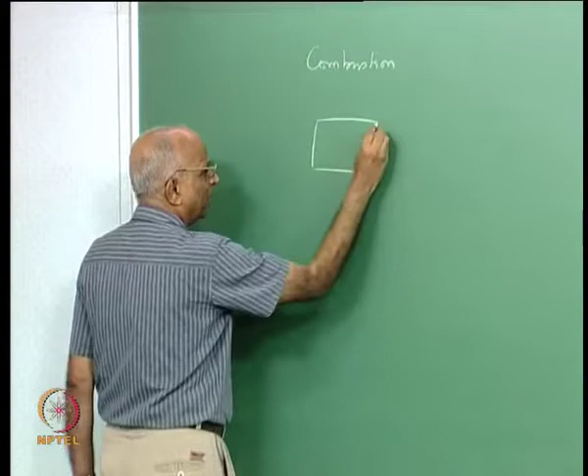We talked in terms of a liquid propellant rocket. We told ourselves if the steady pressure in the rocket, pressure versus time, falls in some way, and if the pressure drop across the injector is less than some value relating to the chamber pressure, it is always possible for the oscillations to grow with respect to time. This is like a diverging situation, and the pressure could reach a level wherein the case may not withstand it, and it becomes a problem.

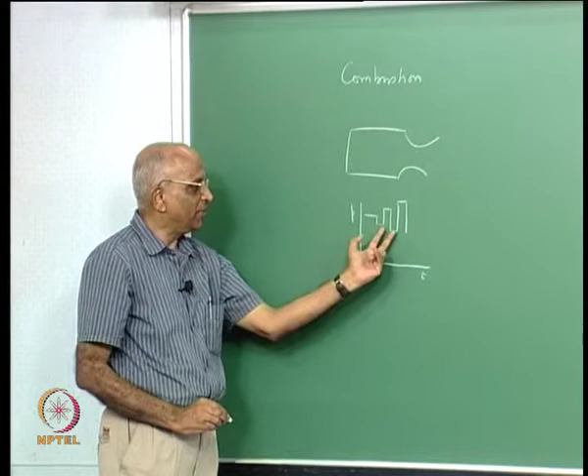Whenever we talk of instability, we mean there is a particular frequency at which the events happen, and also the pressure amplitude keeps growing.

How do we represent it? We said to show something square like this is difficult. Maybe we take a sinusoidal oscillation, and if we have a sinusoidal oscillation, the cycle starts here, goes to a maximum, comes back, and starts again. This is the wavelength of the oscillation, and whenever we talk of a wavelength, that means one cycle of oscillation corresponds to the wavelength, and this is lambda.

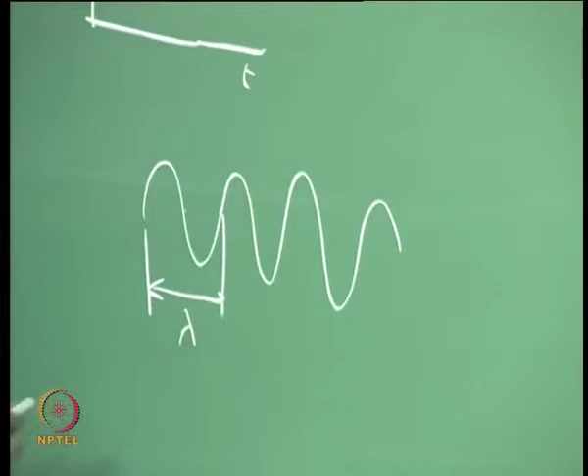Lambda centimeters or lambda meters equals the wavelength of your oscillation, and the amplitude of oscillation, the maximum value above the mean value, is what we call the maximum amplitude p hat. If I have to show this cycle of oscillations, I could say it is like a sin theta or a cos theta, and therefore I can write the oscillation at any particular point.

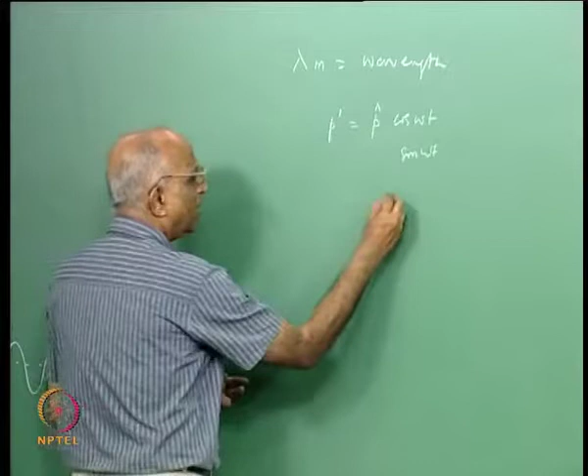How do I define frequency? I have a wavelength lambda, and if my wave is travelling at speed a, then the time of one oscillation equals the wavelength divided by the speed of sound, meaning meters divided by meters per second. So this lambda corresponds to a time t.

What is the frequency of oscillation? Frequency equals 1 over time, so many cycles per second, or this equals a by lambda. Or if I put the frequency in terms of radians per second, omega equals 2 pi into f, so much radians per second.

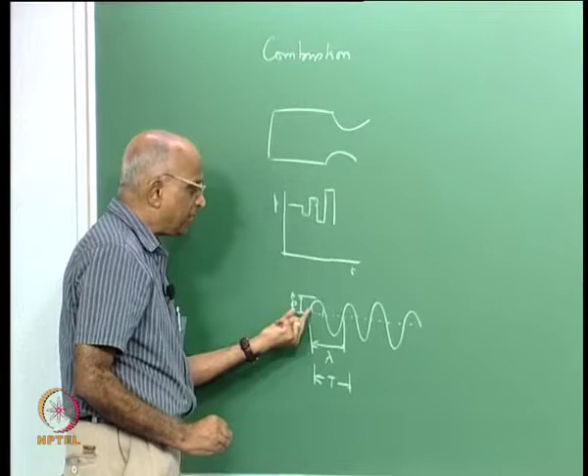How do I now show the pressure amplitude, in terms of both frequency and this value? When omega refers to so much radians per second, the value p prime equals p hat, the maximum amplitude, into e to the power i omega t.

I also wanted to tell whether the oscillations are going to grow with respect to time. If it is growing, the value of p hat will keep growing — it grows with respect to time. So I add one more term and say p hat or p prime can be written as some nominal value into e to the power alpha plus i omega into t, where alpha shows the rate at which the oscillations keep growing.

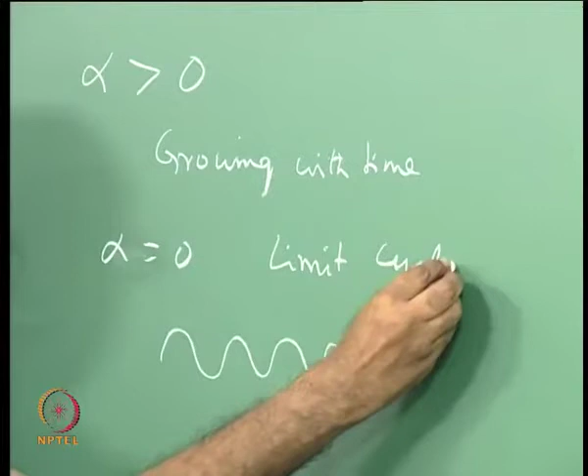If alpha is greater than 0, it means the oscillations keep growing with time, and the system is unstable. If alpha is equal to 0, the oscillations are steady — whatever the peak, it keeps going the same, something like neutral, or a limit cycle oscillation, meaning it keeps oscillating at the same amplitude. If alpha is less than 0, the amplitude keeps decreasing, meaning it is a stable system.

We had defined alpha as the growth rate of the oscillation. What is the unit of growth rate? If I take the logarithm of both sides, I have ln p prime equals ln p hat plus alpha t, therefore 1 over second must be the unit of growth rate. Let us put it together.

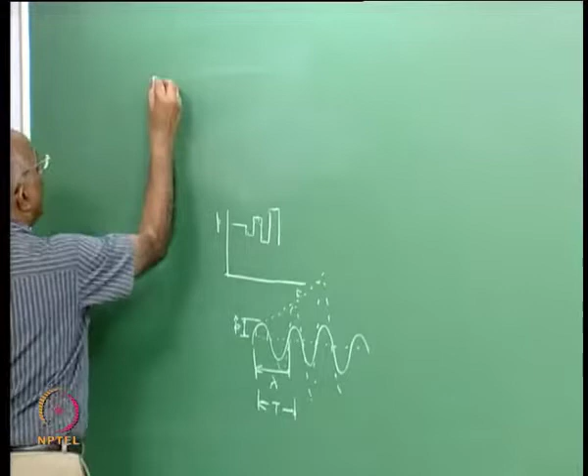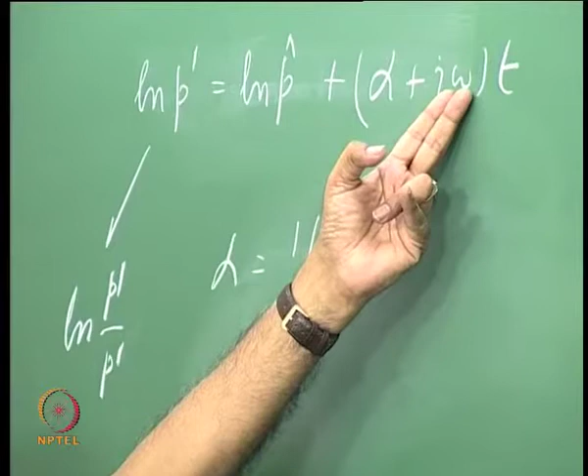I want the unit at which the waves grow. I have ln of p prime equal to ln of p hat, plus alpha plus i omega into t, because ln of e is 1. Therefore the unit of growth rate should be 1 over second, because this is ln p minus ln p hat, so I can write ln p prime minus ln p as ln of p prime by p hat. Therefore alpha should have units of 1 over second, and frequency also has units of radians per second. This is the way we normally show the oscillations.

We also talked of one more important thing. We said that in some cases, when we considered this particular rocket chamber, we never really differentiated the pressure at this point from the pressure at this point. We told ourselves a liquid fuel is injected, it gasifies and produces hot gases, mixes, burns, and the pressure in the entire chamber is the same throughout.

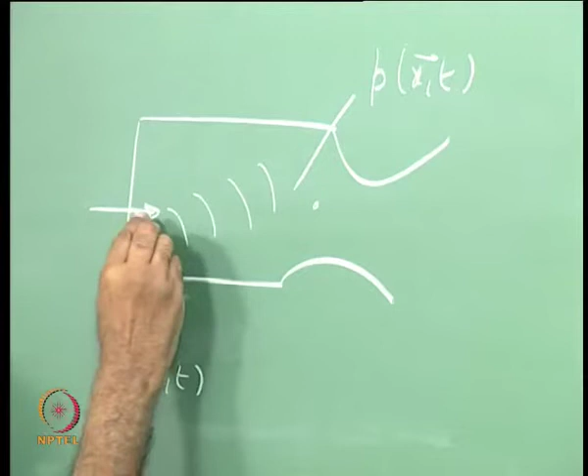But we also know that if I were to create a disturbance at this particular point, the disturbance should travel with respect to time. Therefore the pressure here, if I were to write as P(x,t), should be different from the pressure at this particular point, maybe P prime is the disturbance we are getting. It will be different at different locations x, where x could be a vector, maybe along the axis, it could be anything. As the position changes, maybe the pressure should change, provided the waves are traveling.

When we considered the question of the injector and something being built up, we assumed that the entire bulk of the oscillations, or bulk of the chamber, oscillates in unison. That means whatever the pressure is here is the pressure here is the pressure here, and this is valid only under certain conditions which we have to see.

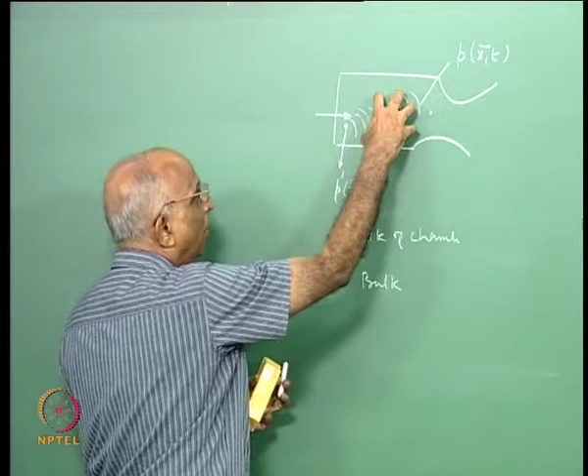Why did we make these assumptions? Therefore we talked of bulk oscillations. What did we mean by bulk? The entire mass of gas in the chamber is as if it were at a point, that means a lump mass assumption, and we lump all the things together and call it a bulk oscillation.

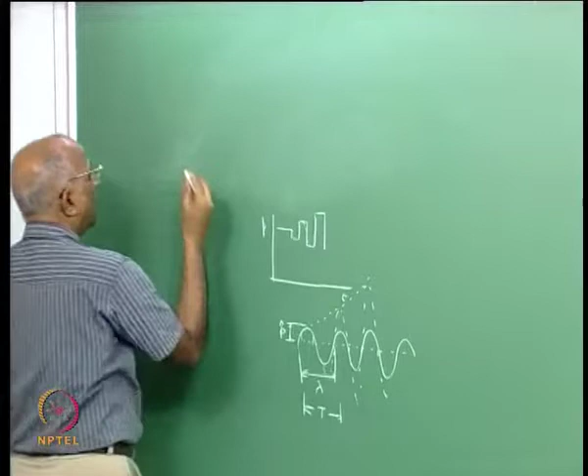Having said that, we also came to the question of: supposing I have a wave, how do I describe a wave, and what did we get at? We said, well, I could have a wave, and let us consider an acoustic wave. What are the different types of waves? We can talk in terms of an electromagnetic wave, an acoustic wave, a shock wave, maybe a blast wave - we will have to look at some of these waves.

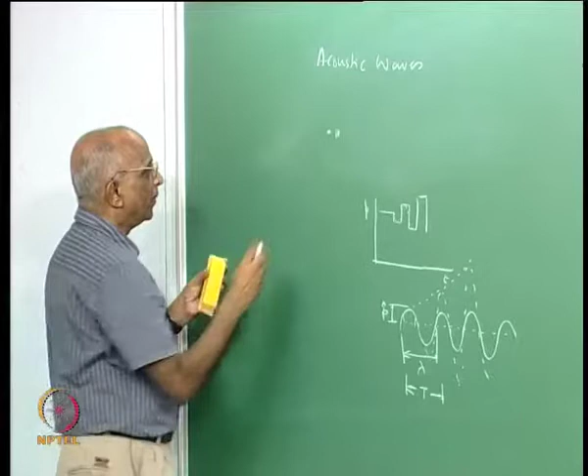When I say an acoustic wave, we mean something like a sound wave, and that is how a disturbance propagates. I make some noise and it comes to you - so what am I talking of? Maybe I make some disturbance, and how does the disturbance come to you? Maybe it compresses the medium - my vocal cord compresses, then it releases, then again it compresses, again it releases the medium.

That means we can represent it as a series of compressions followed by rarefaction, followed by compression. That is how a wave travels, and a sound wave travels at a speed of a meters per second. Under room temperature and room pressure conditions, we know that the sound speed is around 330 meters per second, but it need not be the same speed in a chamber - we will have to see that.

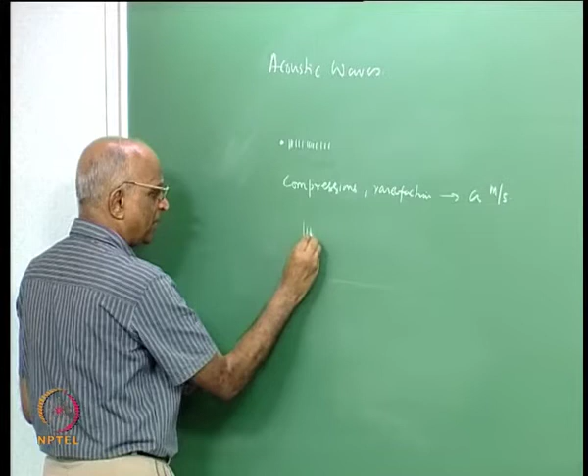Therefore, all what we said is, if it is going to travel as compression and rarefaction, that means I have a compression followed by expansion followed by compression followed by expansion. I can as well show a compression like this, a rarefaction like this, and a wave can be schematically shown as a compression followed by expansion. This is the way a wave travels, and this is x and this is your value of p prime.

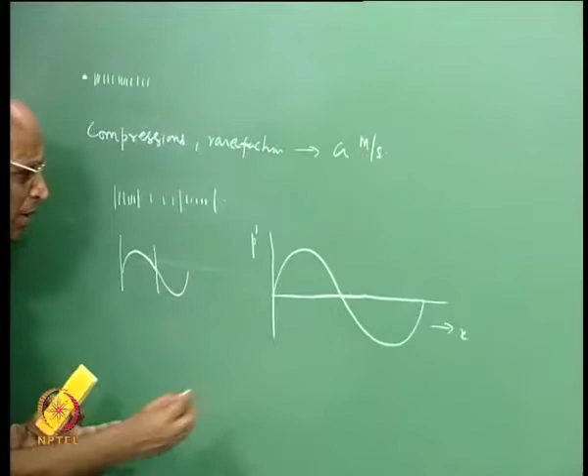Now we wanted an equation for this, and we said yes, this point and this point are in the same phase.

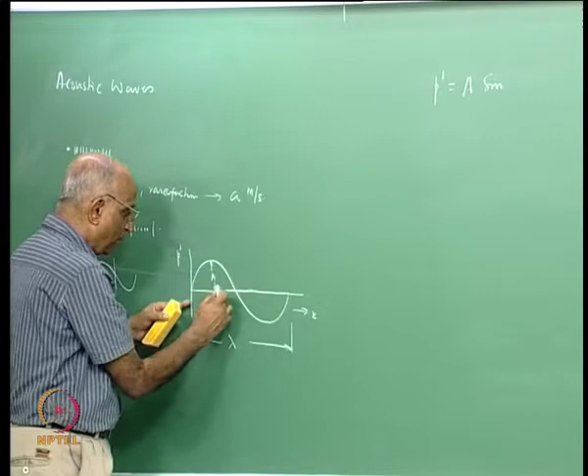I can show this by wavelength lambda, and a wave which consists of compression and rarefaction can be described by an equation. Let us write an equation for this. We say x is the distance along the direction of propagation, and p prime is equal to the amplitude. This amplitude I call a, and it is a single wavelet I am taking, a into sine of 2 pi corresponding to lambda, and I want to find out the amplitude at x. Therefore, x by lambda gives me a particular position, so 2 pi by lambda into x is the equation to this.

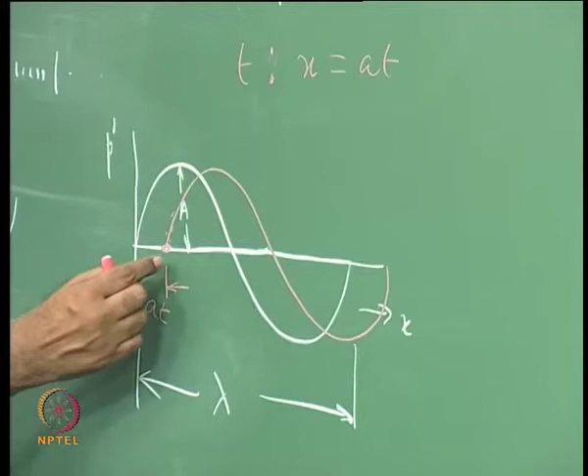But we also said that this wave is apparently travelling, and if it were to travel at a speed a, at a time t, the wave should have travelled a distance x is equal to at. At time t it would have come over here to this position, and this distance travelled is equal to at. Therefore, the equation to this travelling wave, since I want at any x, I have to subtract the value of at, becomes a sine of 2 pi by lambda into x minus at.

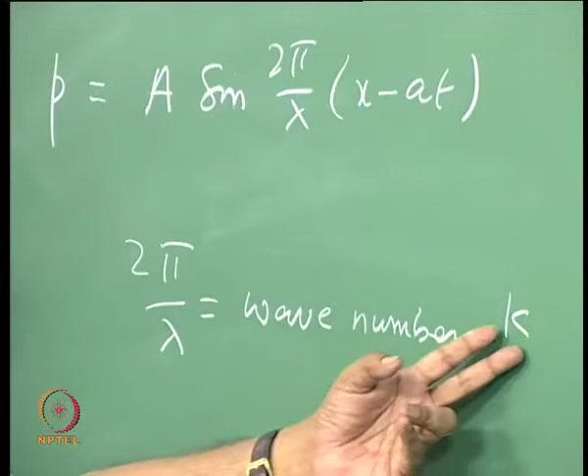Now we want to simplify the whole thing again and put this equation in a slightly simpler form, more amenable to analysis. So I can always say 2 pi by lambda is what we call a wave number, and this I call k, capital K. Capital K tells the wave number, defined as 2 pi by lambda.

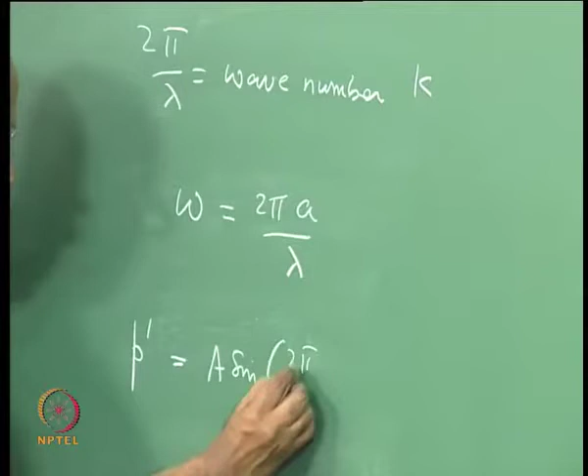Now I substitute these two into this equation, and I get the oscillation p prime is equal to a sine of 2 pi by lambda into x minus 2 pi by lambda into at. Since I know the wave number is 2 pi by lambda, I can write it as a sin(kx), and 2 pi a by lambda is equal to omega. Therefore the equation to the wave which is travelling is p prime equals a sine of kx minus omega t.

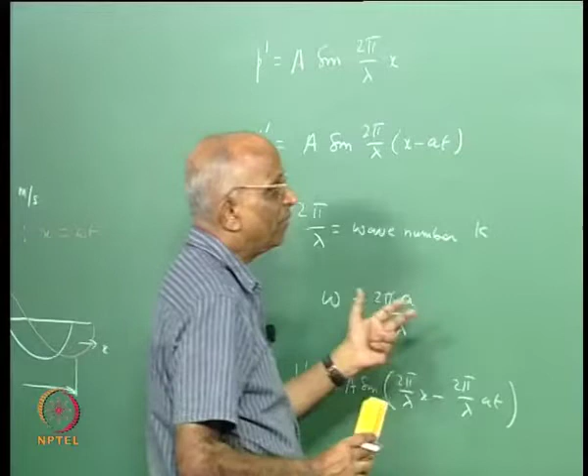Let us remember this form, because k, the wave number, goes inversely as lambda - 2 pi by lambda is known as the wave number - and omega is the frequency. We are interested in the frequency of oscillations and the wave number, so we can write it in this particular form.

Now I consider the wave travelling in a tube, closed at both ends. The wave is travelling forward, comes and hits a solid surface here, and assuming no attenuation - the wave does not lose any energy - it is reflected back. When it is reflected back, travelling in the opposite direction, the equation to the reflected wave should be equal to a sine of minus kx minus omega t, which becomes minus a sine of kx plus omega t.

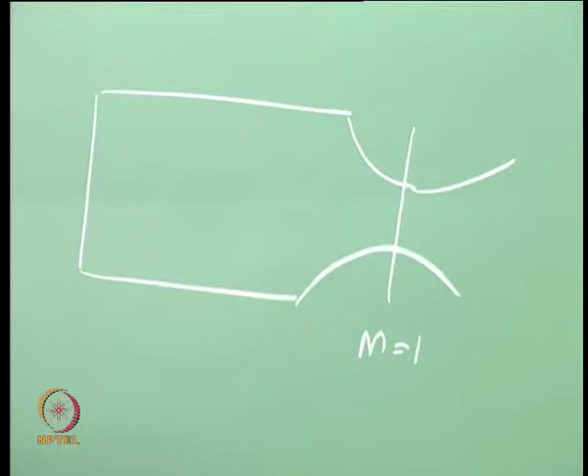Now we want to find out - after all, a rocket chamber consists of something like a hollow, a cavity. What does the cavity consist of? Here it is blocked, here you have the injector, nothing can go in this direction, and you have the nozzle in which high velocity gases are flowing - the throat is sonic, Mach equal to 1. Whenever we plotted the density and pressure variations in the nozzle, we found density keeps decreasing, becoming very rapid at the throat. There is such rapid change in density at the throat that it behaves something like a solid surface itself.

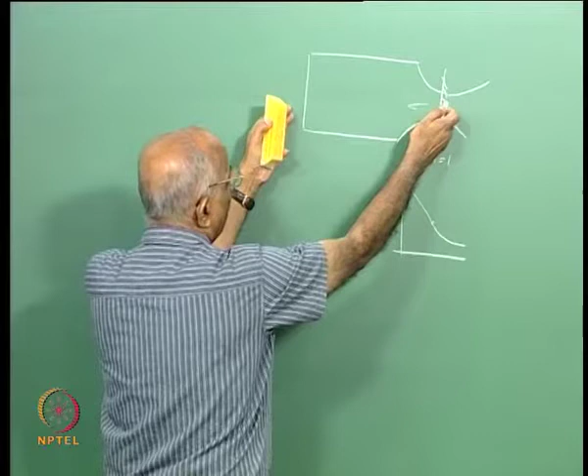There are so many changes in density that the wave, when it sees this, behaves like it's hitting a solid surface, and therefore it reflects back. Therefore, the chamber of any rocket is like a cavity closed at both ends.

Now, you have a wave travelling forward, given by A sin(kx minus omega t), and the reflected one is given by minus A sin(kx plus omega t). Therefore, you have periodic disturbances created as the forward travelling waves interact with the reflecting waves, and the net wave is a combination of the incident and the reflected waves.

Therefore, I can write P, the resultant wave, equal to the incident wave plus the reflected wave. Incident wave P prime, the resultant fluctuation, is A sin(kx minus omega t). Plus the reflected one, which we just saw is minus A sin(kx plus omega t). This is the resultant.

If this is the resultant, let us solve this. Sin(kx minus omega t) equals sin(kx)cos(omega t) minus cos(kx)sin(omega t). Since I have A for the first term, the second term becomes minus A sin(kx)cos(omega t), and now with the plus, it is minus A cos(kx)sin(omega t). Adding these two together, this term drops off, and the resultant wave equals minus 2A cos(kx) sin(omega t).

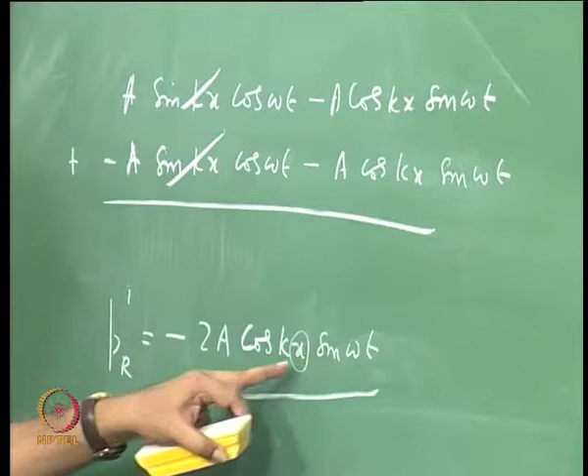Let us ponder on this resultant wave for a couple of minutes and see what is happening. What does this represent? Maybe at some location x, where cos(kx) gives the magnitude of 2A cos(kx), I have P prime. My chamber, which I now say is as good as a closed cavity, and this closed cavity is of length L.

All I am trying to say is maybe at this point x equals 0, cos(kx) is 1, so I have minus 2A sin(omega t), but that means the amplitude of oscillations here is quite large. Maybe it oscillates like this, with my time axis, and the frequency of oscillation is given by omega.

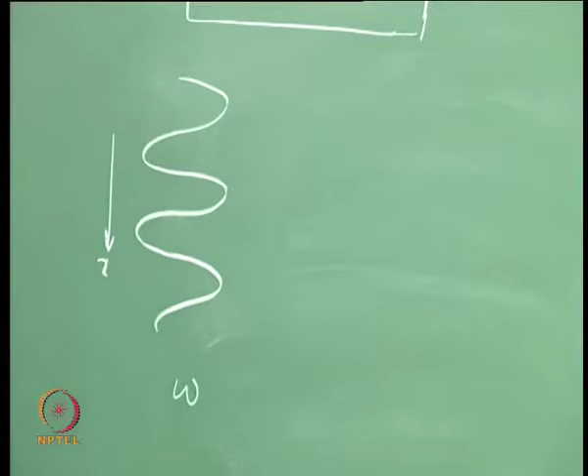Maybe at some other location where x is not equal to 0, cos(kx) is less than 1, so the magnitude at that location is lower, smaller. My amplitude comes down, and I have oscillations at the same frequency omega, but my magnitude gets changed.

At another location, the magnitude may be still smaller, I have to find out, but the frequency will be the same. So what do I get? I get, at fixed points, oscillations of a certain amplitude, and these are not travelling anymore. That means the combination of the incident wave and the reflected wave leads to something like a standing or stationary wave, which no longer travels.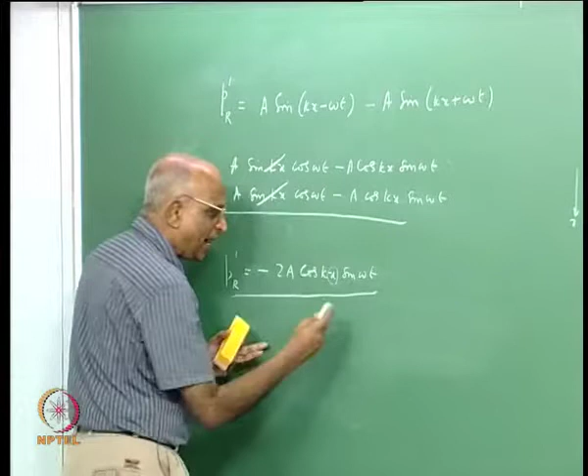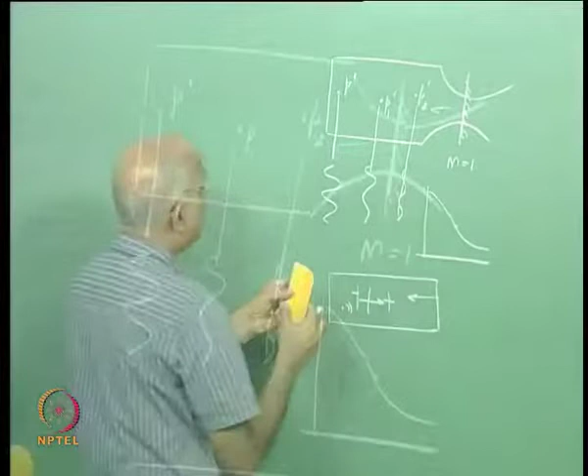So what is going to happen to my combustion chamber? If the waves are travelling forward and backward, at some point I will have a certain value of P prime, at another point a smaller value, and at a third point maybe still a different value of P prime. This P prime oscillates at some frequency, the same frequency everywhere, only the amplitude is different. Here the amplitude may be so small it's like this. Therefore different points have different pressures, but each point oscillates in place, things are not travelling.

That means it becomes a standing wave, and therefore the combination of the incident wave and reflected wave leads to a standing wave. The characteristics of the standing wave are such: at a given location the amplitude remains the same throughout the period, at different locations the amplitude changes, but at a given point the amplitude is the same.

Whereas if I talk in terms of a travelling wave, what is the equation to an incident wave? P incident, p prime, we said is equal to a sin(2 pi by lambda into x minus at). What is going to happen to a travelling wave? The point sees the maximum amplitude a, then it sees a slightly smaller amplitude, then it sees a negative amplitude, then a positive amplitude. Whereas with the combination, at a particular point I get the same value, the amplitude does not change at all, and this is important.

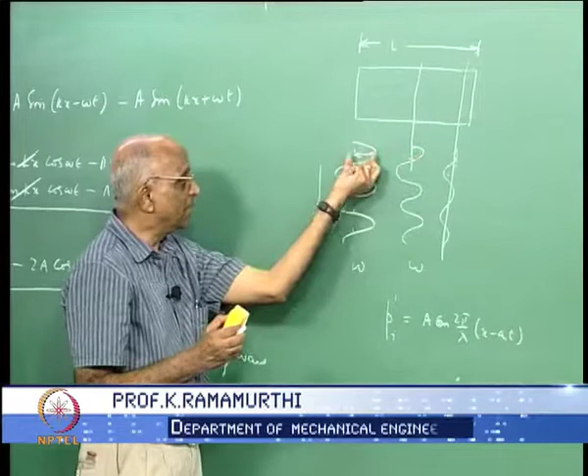In a wave in a cavity, because you have forward and backward waves which are interacting, you are led to a standing wave or a stationary wave, and the frequency at the different points remains the same, but the amplitude at the different points is different.

Is this clear? If this is clear, I can now calculate the frequency. How do I calculate the frequency of the wave? Well, I have the equation to the net wave, let us write it again: P is equal to minus 2a cos(kx) into sin(omega t).

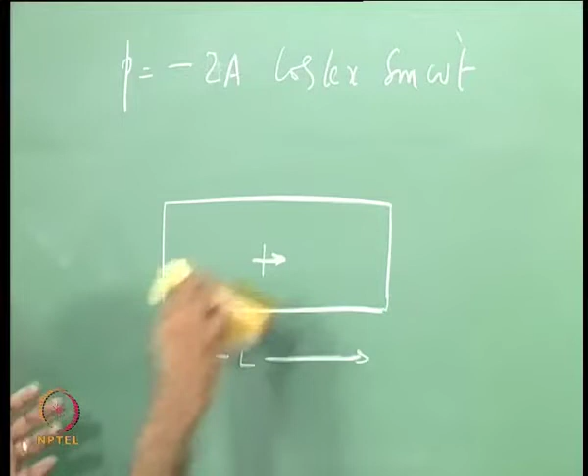Omega is the frequency. I want to calculate the frequency, therefore I again make the same plot. This is my cavity, I have simplified my cavity as a cylinder of length L, and my wave is travelling in this particular direction, it interacts, and therefore I now form a standing wave.

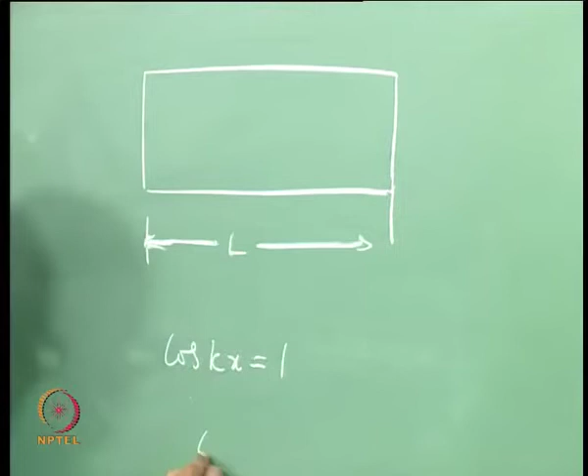Now what is going to happen? I take this particular term and tell myself this is a closed end. At a closed end the velocity perturbation should be 0 because it is a solid surface. If velocity is 0, the pressure should be a maximum, and therefore the value of cos(kx) should be equal to 1 at this end and at this end. At this end, the moment I put x equal to 0, indeed it is satisfied. At this end also it is a closed end, therefore I say cos(kL) is equal to 1.

If cos(kL) is equal to 1, then kL is equal to n pi, where n could be 1, 2, 3, 4 and so on, because we have no control, it could be 180, it could be 360, it could be any number. And therefore, if kL is n pi, and k, the wave number, was equal to 2 pi by lambda, then 2 pi by lambda into L is equal to n pi.

We can now simplify this equation to read lambda is equal to, let us put it together, lambda comes on top, and therefore you have 2 pi L divided by n pi is the value of lambda.

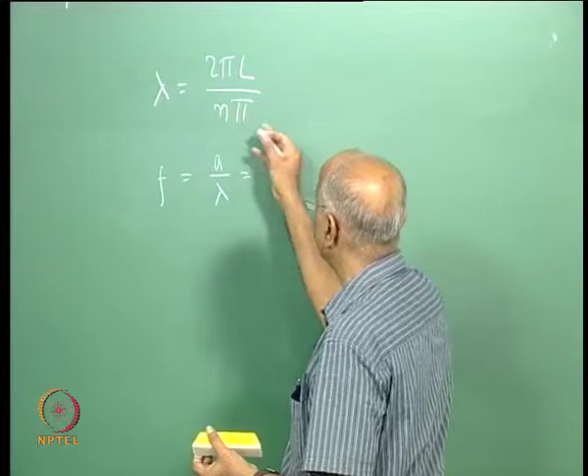And what is the frequency? Omega is equal to, let us put it together, what was A by lambda, or frequency, let us put it as frequency itself, why carry f over here. Frequency is equal to A by lambda, sound speed by the wavelength, that is distance travelled in one wavelength. This becomes equal to, if we were to substitute the value, A into n pi divided by 2 pi L, and pi gets cancelled, so I have nA by 2L is the frequency.

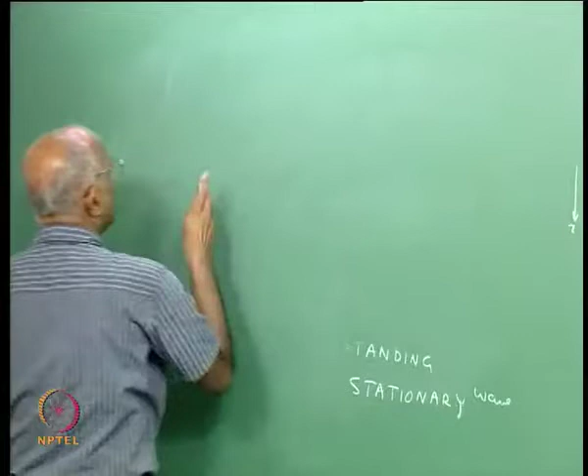Let's internalize this a little bit by working an example. Supposing I have a chamber of length, let us say half a meter, 0.5 meters, which looks reasonable, and the velocity of sound in the chamber is, let us say, 1000 meters per second.

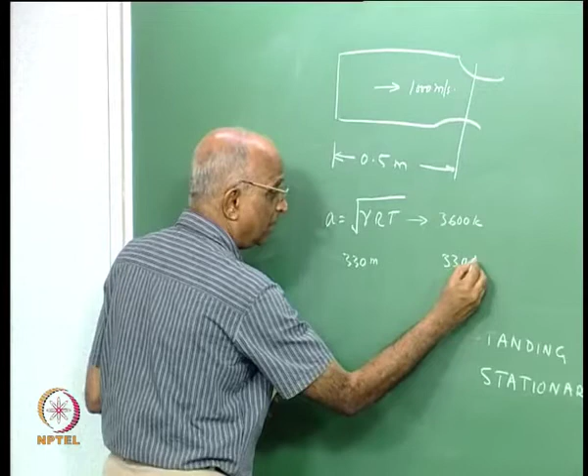Why did I write 1000 meters per second? The velocity of sound A goes as gamma RT under root, which all of you would have derived, A square equal to under root dP by d rho, and therefore this becomes gamma RT, and the temperature in the chamber is quite high, of the order of 3600 Kelvin. The ambient temperature at which sound speed is 330 meters per second is around 30 degrees centigrade.

And therefore, if I take the mean temperature in the chamber to be something like 3000 or 3600, and if I take the ambient temperature as 300 Kelvin, I get the speed of sound to be much higher, maybe under root 10 of 330, and this gives me around 1000 meters per second.

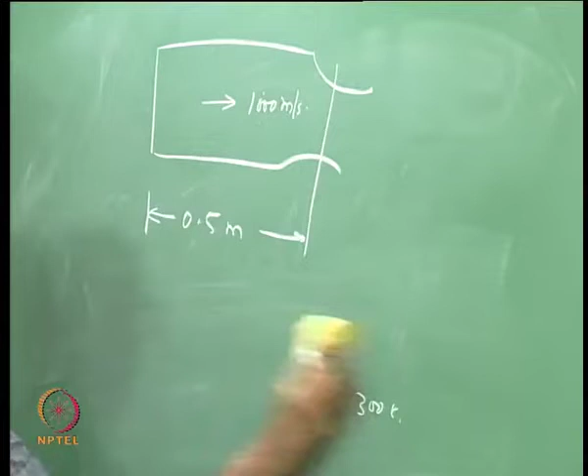I just take a number, it could be between 900 to 1200, and therefore what is the typical value of frequency? For n equal to 1, we have frequency equal to Na by 2L, and in this case n is equal to 1, that means fundamental, A is 1000, divided by 1, which is equal to 1000 hertz or 1000 cycles per second.

This is the frequency at the fundamental, and now if you look at the wave structure, the way the waves are formed, at the point on the left hand side, it is a pressure antinode. At the nozzle portion where you have steep gradients, it is again a pressure antinode. Therefore I have large oscillations over here, similarly large magnitude oscillations over here, and in between at the center I have a node.

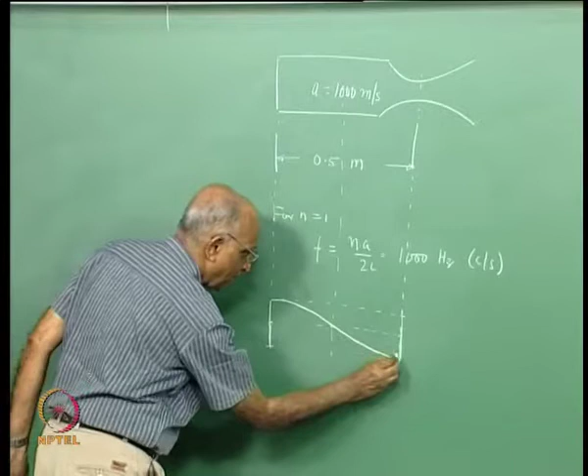In other words, the oscillations are maximum on the left hand side and over here, meaning I have oscillations of this magnitude over here, and similarly on the right hand side oscillations of this magnitude, and now the oscillations keep decreasing until at the pressure node the oscillation is 0. I have therefore the waveform like this.

All what I am trying to say is, on the left hand side where you have a pressure antinode, the oscillations are like this, of large magnitude. The oscillations here in pressure are 0, being a node, and over here the oscillations will be of exactly the same amplitude but of a different phase. Now I will get the value coming out positive here, and negative here, and therefore the oscillations are like this.

Therefore, at the fundamental, you have large oscillations in the amplitude of pressure at the antinode regions. When the oscillation in amplitude p bar is maximum and positive in this case, the amplitude of oscillations leaving the nozzle is negative, and therefore the thrust of a rocket motor, which depends on the pressure at the nozzle, could be out of phase with the pressure oscillations as measured at the head end of a rocket motor.

Our aim was to find out the frequencies for the different cases, and therefore now if I consider n equal to 2, the frequency is now 2 into 1000, that is 2000 cycles per second or 2000 hertz.

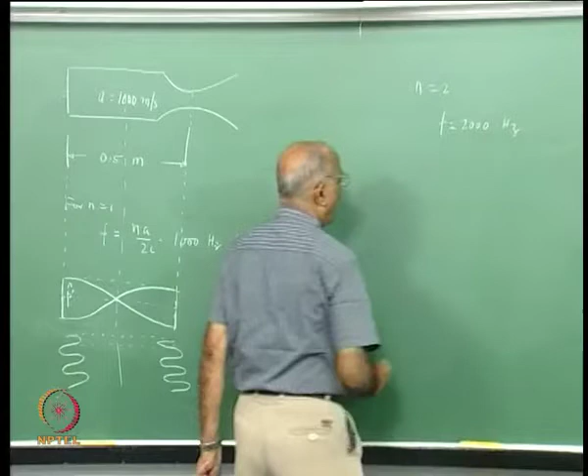What will be the type of wave structure I get? I have something like an antinode here, and at the nozzle an antinode over here. In the first case I just had these points, that was my waveform at n equal to 1. Now I start getting a node here, an antinode over here, a node here, and therefore my magnitude of oscillations will go like this, come back over here, go over here, come over here, go over here, again come back. In other words, n equal to 2 gives me 2000.

In this case, my pressure node corresponding to n equal to 1 now becomes my pressure antinode, and this is my magnitude of oscillations, the frequency is 2000.

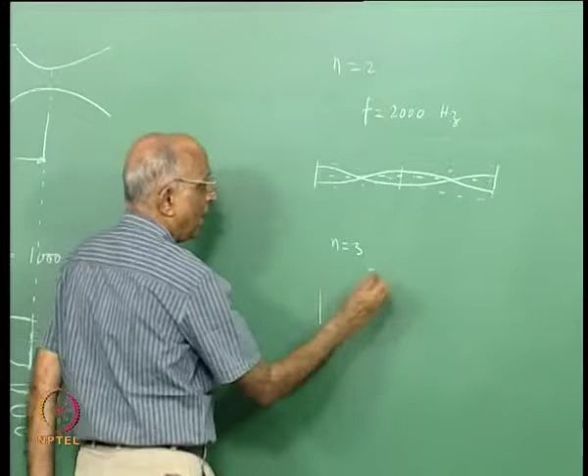When I have n equal to 3, I again need maximum pressure over here, meaning I need one more waveform. I come over here, this again becomes my node, and I start getting more waveforms. I get something like this, coming back over here, coming over here, coming over here, coming over here, and similarly the waveform goes like this, and so on for different values.

Now n equal to 3 gives me a frequency of 3000, and what I observe in all these cases is that I get discrete frequencies corresponding to the case of pressure amplitudes.

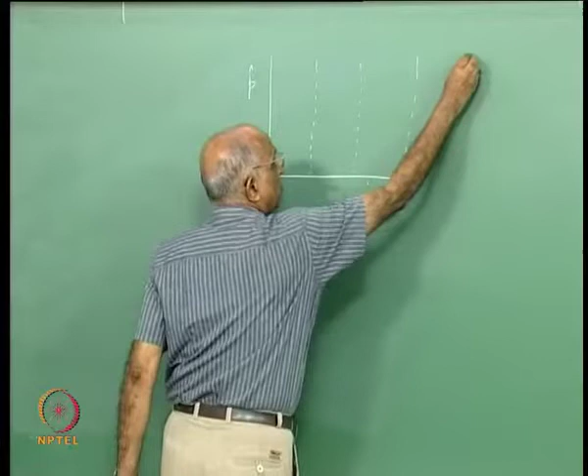Let me plot the maximum pressure amplitude at the antinode portion. I get it at 1000 hertz, then again at 2000, at 3000, at 4000, and so on. These are the discrete frequencies at which I get pressure oscillations. Maybe this is my magnitude here, maybe this might be my magnitude here, this might be my magnitude here, therefore I get oscillations like this.

What is important to note is that only at these discrete frequencies of 1000, 2000, 3000 and 4000 hertz do I get amplitudes. In between these frequencies, say between 0 and 1000 or 1000 and 2000, there are no oscillations at all. It is all discrete at these particular values of frequencies.

We call n equal to 1 the fundamental, and n greater than 1, that is 2, 3, 4, as harmonics. N equal to 2 is the first harmonic, n equal to 3 is the second harmonic, and n equal to 4 is the third harmonic.

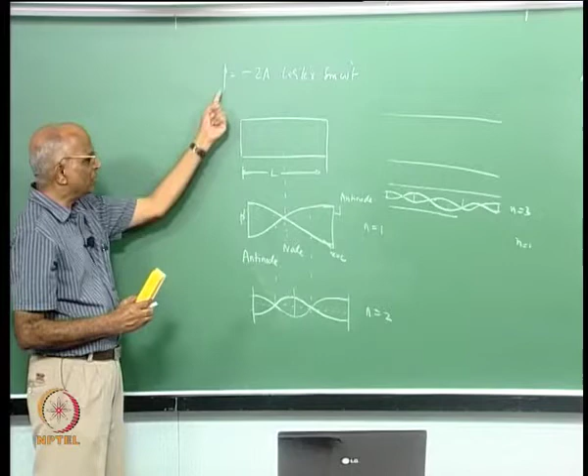Now the question comes, why should there be only pressure oscillations? It is also possible to get velocity oscillations, since in a chamber I am getting flow. I also told you this is a closed end, therefore the velocity perturbation here is 0.

How do I calculate the velocity perturbation from the pressure perturbation? I use my momentum equation. Rate of change of momentum by Newton's second law is equal to the impressed force, so I write dV by dt equal to minus the pressure difference, that is, mass into acceleration.

If I have a distance dx, with area combining over here, I bring dx down, and the total mass is rho dx, so I get 1 over rho. This is my momentum equation: dV by dt equals minus 1 over rho dp by dx. Equivalently, mass into acceleration equals the impressed force, where rho dx into A is the mass, giving minus dp. This is my momentum equation.

What was my value of pressure? Let us say my velocity perturbation and pressure perturbation over here. My pressure perturbation was equal to minus 2A cos kx into sin omega t, which we derived earlier, this was 2a, the pressure perturbation coming from the incident and reflected waves.

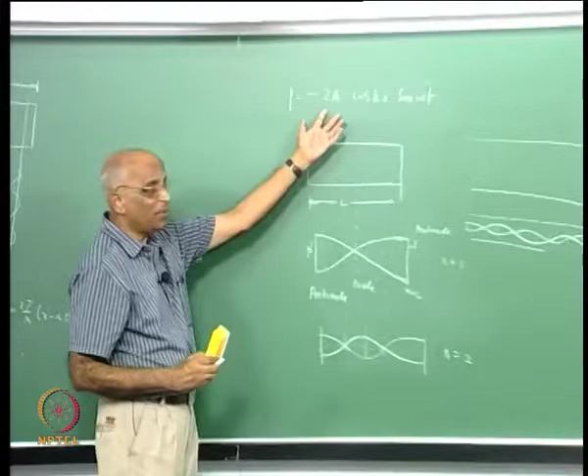I want to find out my velocity perturbation, so I differentiate the pressure perturbation with respect to x. I get dp prime by dx equal to plus 2k sin kx into sin omega t.

Now I have to get the value of v prime. Dividing by rho gives dv prime by dt equal to 2k sin kx by rho into sin omega t. Now if I integrate with respect to time, taking all the constants including 2k by rho and dividing by omega, I get something like b into sin kx into cos omega t.

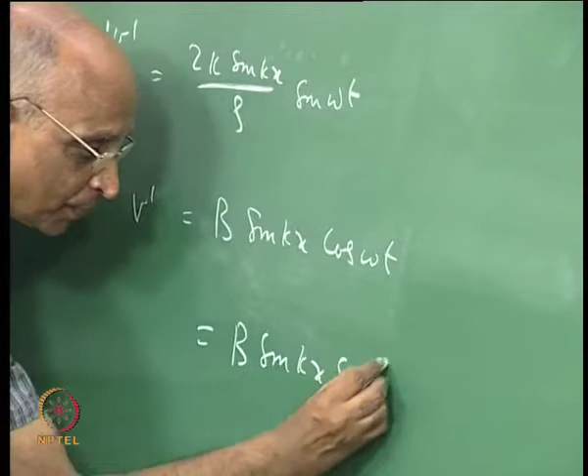Now I find I get cos omega t, whereas my basic pressure signal was sin omega t. My velocity signal v prime is therefore written as b sin kx into sin of omega t minus pi by 2. In other words, the velocity perturbations lag behind the pressure perturbations by pi by 2, that is 90 degrees.

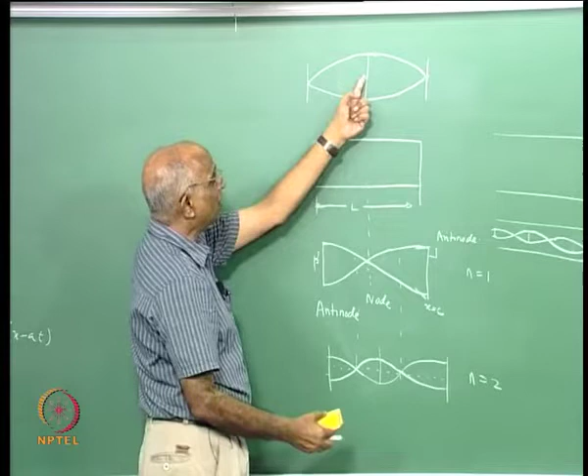Since it is lagging behind, I can now plot this. For the same case, if I plot my velocity perturbations, shown on top, lagging by 90 degrees, I get velocity node here and velocity maximum there, giving my velocity perturbation curve. So wherever I have a pressure antinode, I get a velocity node, and wherever I get a pressure node, I get a velocity antinode.

This is all about standing waves, but standing waves are important because they tell you, at a particular location in the chamber, what is the value of p prime, and therefore it is possible to get the fluctuations. If this part is clear, let us put together what we studied earlier and what we studied today for standing waves.

What is it we are telling? Suppose I have a chamber, and this is the length of my chamber.

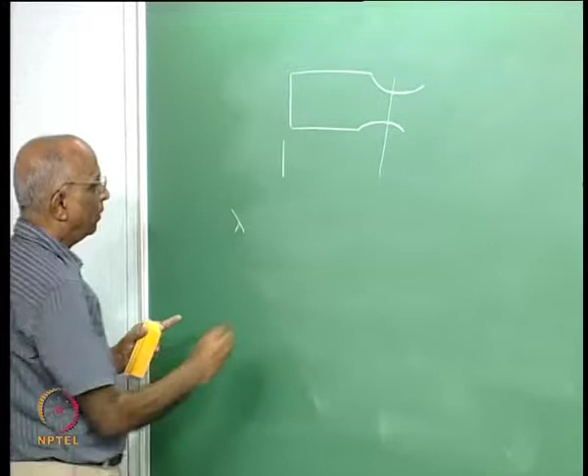If I have a wave of very long wavelength, what am I saying? My distance is x, and my wavelength is very long, so long that I get a wave like this. Because the wavelength is so long, there is not materially much difference in the pressure perturbations compared to the length of the chamber. If my wavelength lambda is going to be very much larger than the length of the chamber, then my value of p at x,t need not be a function of x.

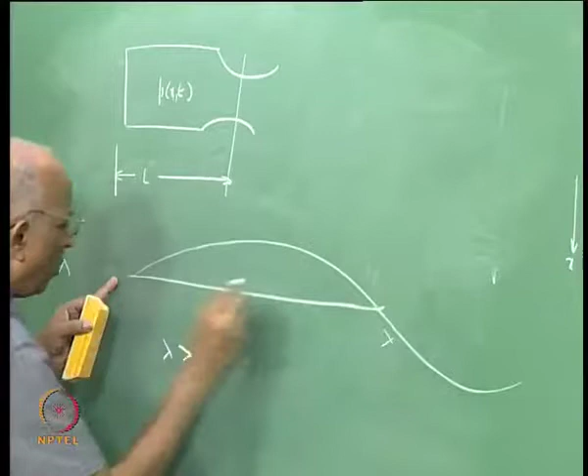If it is very much longer, maybe it goes like this and comes over here. That means the pressure in the chamber can be very small - the bulk mode of oscillations corresponds to the condition when the wavelength is so large that the length of the chamber is very much shorter than the wavelength. I can assume the value of p(x,t) for all x to be the same as p(t). The bulk mode of oscillations will happen only for large wavelength, meaning very low frequencies.

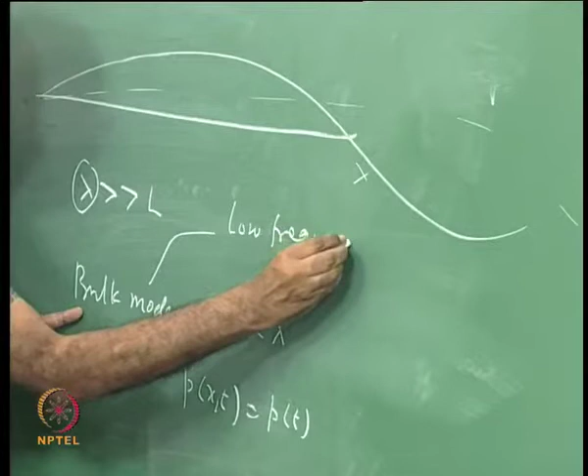Whatever we studied for bulk mode of oscillations coming from the injector or from a solid propellant, from the response of the surface, giving you the oscillation wherein the pressure came down, went up, went off, came down again like this - these have to be essentially at low frequencies.

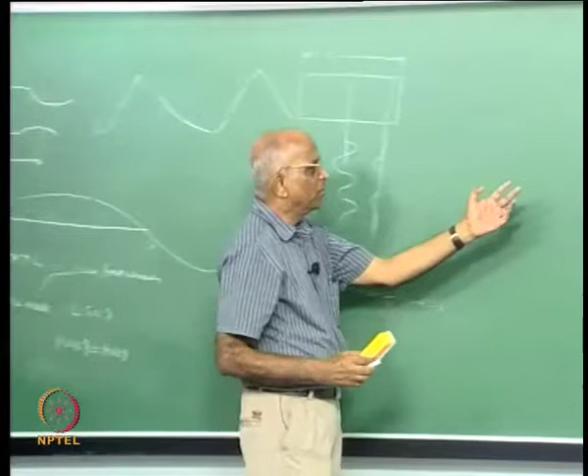Therefore, L-star oscillations which we studied yesterday are essentially low frequency oscillations, and the wave mode of oscillations must essentially be at higher frequencies. I think this part must be clear to each one of us.

Okay, let us now go forward and try to understand a little bit more of what we wanted to study further. If this part is clear, I ask myself one question - we have still not addressed the point when we had the flute and said it makes some noise. Why did the noise come? I want us to be very clear about it.

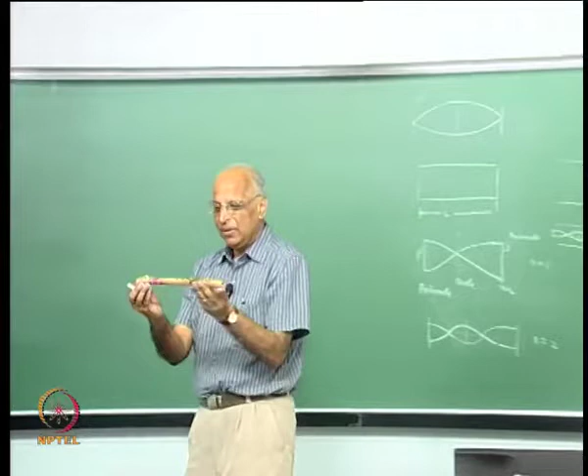Let us say this is the particular flute we had. We said this is the length of the chamber. We had a small hole at the point where we are injecting. Let me draw this figure again. I blow air over here, I allow it to come, I have a small hole over here, and then I have the chamber. We also have, for musical purposes, different frequencies - I have a series of holes here, and this end was open.

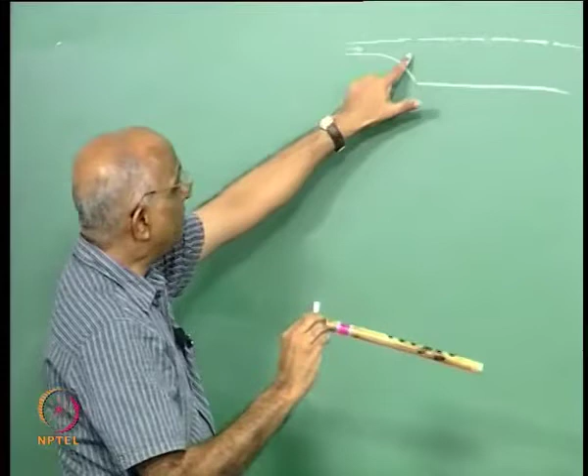I now close this end - I have a closed end here. I blow air here, still it makes noise. But if I were to plug this hole, which essentially generates the disturbances, I blow and it does not make noise. In other words, the disturbances created here because of this interaction go forward, get reflected at the open end, travel back, form a standing wave, and this standing wave gets modulated by these holes.

If I open it, maybe my length gets decreased, therefore my frequency gets changed - I have a higher frequency, and then I keep playing with the frequencies by opening these holes, and I can play music. This is essentially what is happening in a rocket chamber also when I have an instability problem.

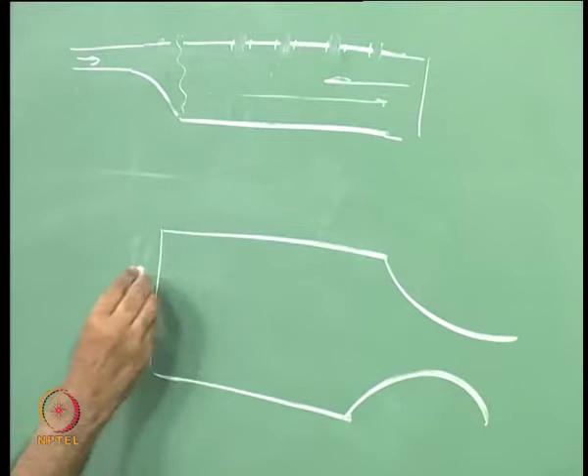I have the chamber like this, I have the nozzle over here. Maybe I could get combustion taking place here. The combustion interacts with the pressure mode here, increasing my amplitude of pressure at this point, and the standing wave amplitude increases, and therefore my pressure increases. With respect to pressure and time, I start with small oscillations here, it grows faster and creates a problem for me. I end up with very high pressure.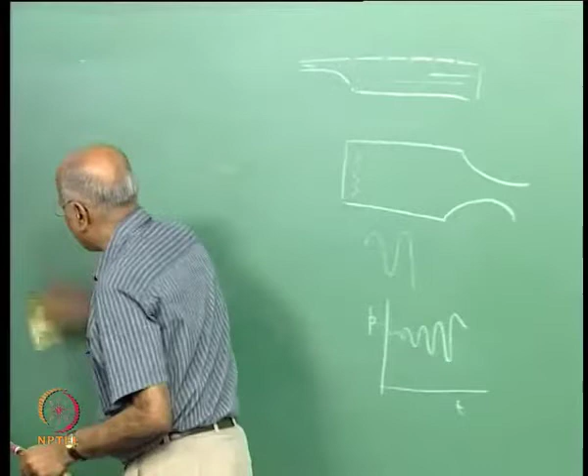And this is what we mean by combustion instability. Combustion instability happens in the standing wave mode, and it is known as the wave mode of combustion instability. Therefore, let us now put together the points we have studied so far. We tell ourselves, well, combustion instability could happen

either in the bulk mode of oscillations, and these bulk mode oscillations are essentially low frequency. Why is it low frequency? Because all points have the same pressure - rather, lambda is very much greater than the characteristic length over here.

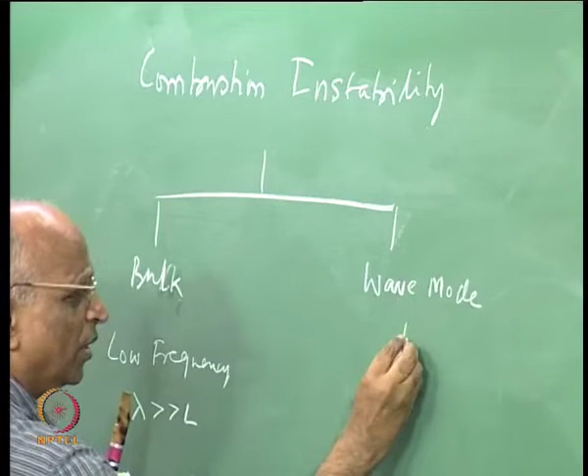Or it could also happen in the wave mode. We are still to write an equation and find out what happens in the wave mode, but we recognize in the wave mode the frequencies - lambda is going to be comparable with the length, if not less than the length - and this happens essentially at higher frequencies.

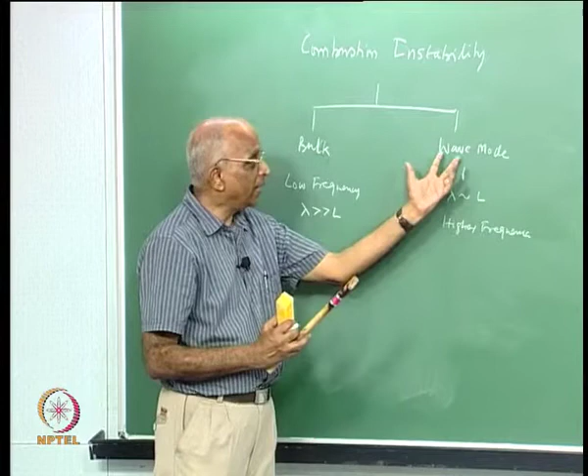Therefore, we say that injector induced oscillations or feed system induced oscillations are essentially low frequency oscillations, or because of the heating of the propellant and low L-star values, I have low frequency oscillations, whereas for wave mode that need not be true - I can have any standing wave and it would create oscillations at higher frequencies. I think this part must be clear.

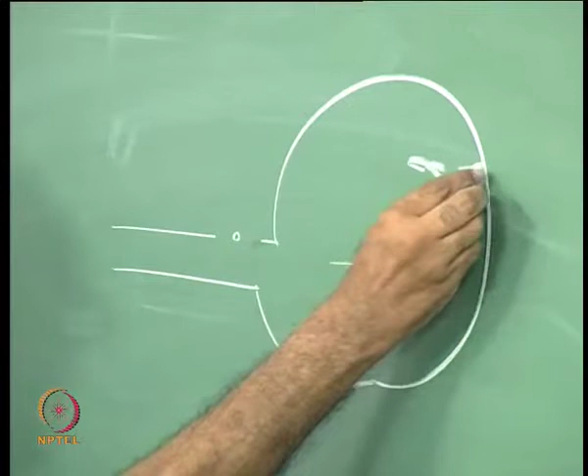Yesterday I showed you the figure of a whistle. The whistle was not long. What was the construction of a whistle? Same thing over here, a hole over here, a chamber, but the motion was not in this direction, it was in this direction. It could have been oscillating in the tangential mode or the radial mode, but we have studied only in terms of axial oscillations, something going up and down.

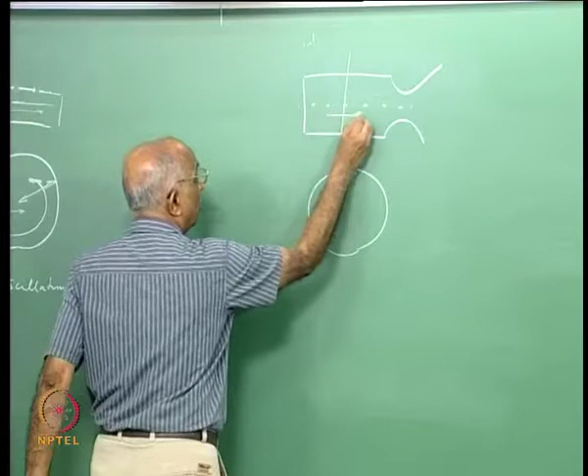Now in a rocket chamber, let's plot it out. It is also possible, since the chamber is cylindrical in shape and any cross section I take is a circle, for waves to go up and down forming a standing wave in the axial direction. It is also possible for the wave to go in the circumferential direction, which we call tangential. Why tangential? I have a center, and it could also go in the radial direction, so I could have oscillations in the radial direction, making the problem even more complicated.

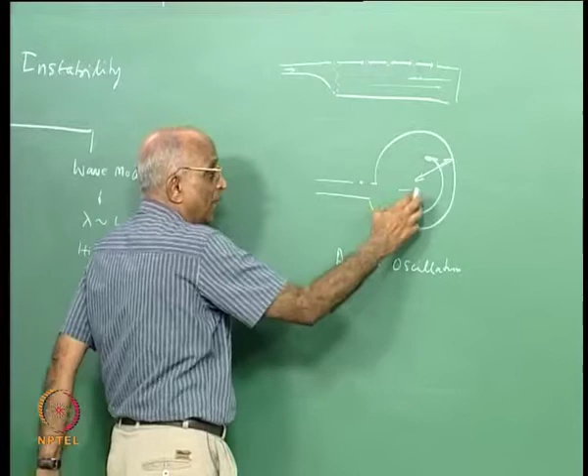That means I could have oscillations in the radial and tangential direction, just like in a whistle. It's a small thing, but still it made a shrill sound. That means I induce disturbances, the disturbances travel in the tangential and radial modes, and I get that shrill sound of a whistle.

So I could also get tangential and radial modes in a chamber. How do I solve for the tangential and radial modes? Well, it's a little more complicated. I cannot write the simple equations, because for the axial case I could readily write P prime equals A sine of 2 pi by lambda into x minus at, for the forward wave, from which we derived the equation. But it becomes more complicated, and I have to go back to my basic wave equation.

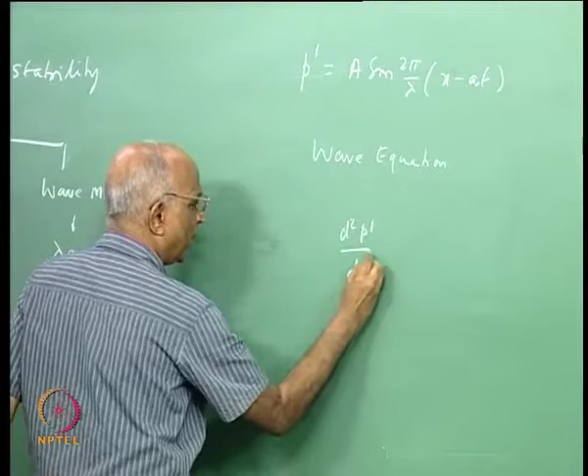What is the wave equation? For a one dimensional axial wave, d squared P prime by dt square equals a square into d squared P prime by dx square. Let's see if it's clear: a square is meter square by second square, meter square here, t square there.

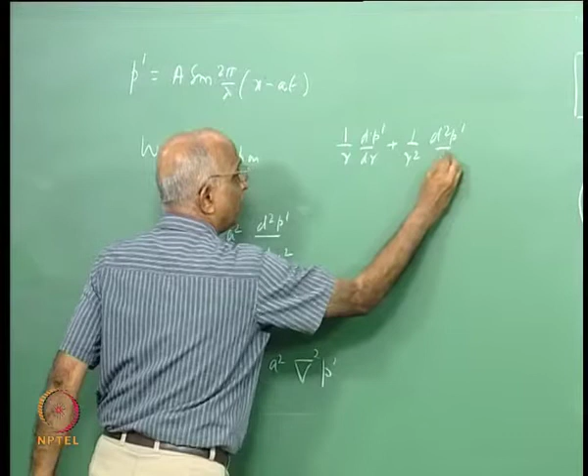But I can readily solve it using the method of separation of variables - maybe you all should do it - and when I do, I can find out the modes of oscillation in tangential and in radial modes. I'll show this on a PowerPoint because I didn't want to solve it here.

Let's go back and quickly revise what we've done and where we are now. We said the reflection of an incident wave from the solid body creates a standing wave. You have pressure antinodes at the closed ends and a pressure node at the center. This is the magnitude of oscillations, 2a, and the frequency is equal to a by 2l.

When I go to the first harmonic, n equals 2, I have antinodes here, another antinode at the center, and nodes here - this is the shape of the wave. When I go to the next harmonic, n equals 3, I get another series: antinode, antinode, antinode, antinode, and three nodes.

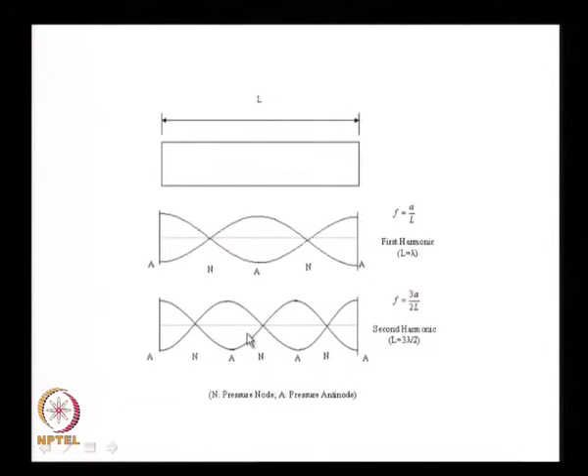If I now put the velocity together, at the region of pressure antinode I get a node in the fundamental, and an antinode here. Then in the first harmonic, n equals 2, I get antinode, antinode, node, node, node. In the next harmonic I get 1, 2, 3, 4 nodes and 3 antinodes, and at the points of velocity antinode, momentum could increase the velocity.

We will look at that in the next class. So now I ask myself what happens in the tangential direction. By this particular diagram I need to qualify it a little bit - what is it I am talking of?

I am talking of a diameter, and now I get oscillations in this particular direction. The first mode of oscillation is: maybe I have an antinode here, an antinode here, it goes like this, and this is what I represent here. I have maximum pressure oscillations here at one time, maybe at the next instant of time I have it here, therefore it is oscillating in the tangential direction.

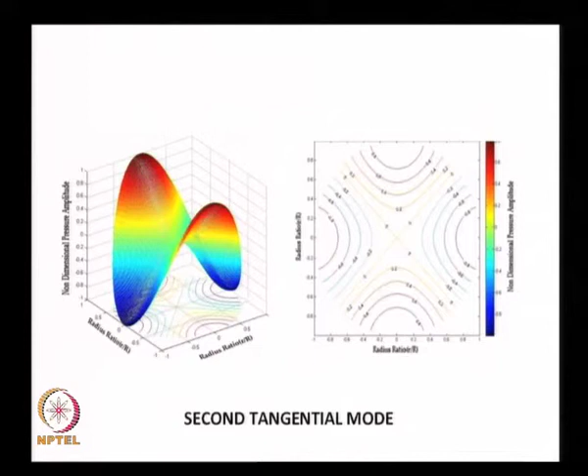And therefore, since all these are oscillating together, it is always possible that some of the radial modes will get coupled with the tangential modes. And how does it get coupled?

If I were to write the pressure P prime as a function of r and theta, and solve the wave equation, I will get something like P hat, the maximum value, into cos m theta, giving the value due to the tangential component. What happens in radial is I get divergence, the radius keeps increasing, and what represents the divergence is the Bessel function. So I get Bessel function of order m into beta, which gives my wave number, a combination of the tangential plus the radial, into r divided by Jm, Bessel function of order m, into beta m, giving Jm beta m over here.

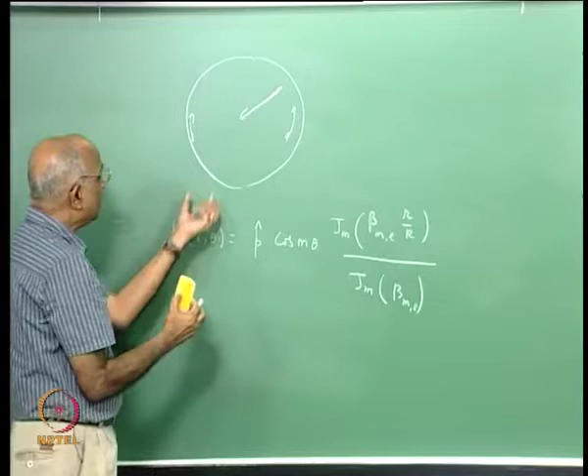It could happen tangentially, it could happen radially, and therefore there are some locations wherein I get antinodes, some locations wherein I get nodes. And if by chance I can excite these maximum values in pressure or maximum values in velocity, I can get a problem of instability.

I will take this up in the next class, and we will try to gain a total understanding of what causes combustion instability in the wave mode and in different modes. Well, I stop here, maybe we continue with it later. Thank you.